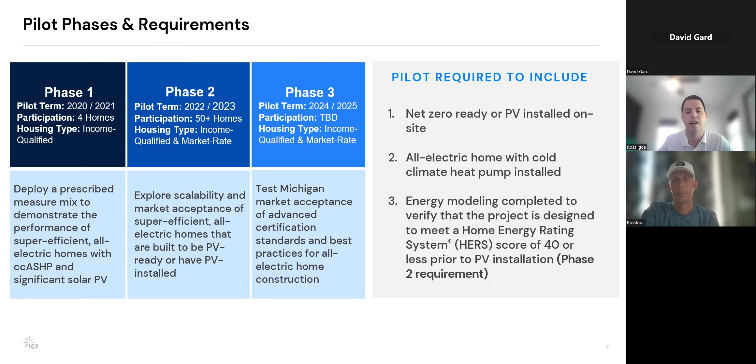Starting in March of 2020, we had the order approving the energy waste reduction settlement and kicking off the pilot in Q2 of 2020, closing out and starting the evaluation piece in Q2 of 2021.

Next came the kickoff for the phase 2 all-electric homes pilot, which was July 14th of 2021. As we continue working with builders on phase 2, we expect this to wrap up probably Q4 of 2023, Q1 of 2024, as we close out over 50 homes that have met program requirements and received pilot incentive dollars.

Next, as I noted, we're looking to launch phase 3 between Q4 of 2023 and Q1 of 2024, focused on the national certifications. We hope to work through this pilot over about a two-year period to enroll projects and provide incentives for those national certifications through Q4 of 2025.

So that's an overview of the pilot purpose, timeline, and objectives. Now I'd like to dive into the specific phases, starting with phase 1.

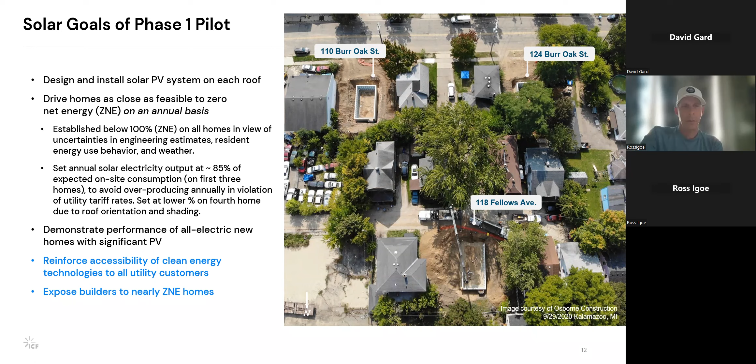Using our modeled results compared to a dual fuel home baseline, there are significant savings. As projected, each home will realize about 75 MMBTU, or 70%, in energy savings.

There's a 58% reduction in annual energy costs with the PV system because of net metering rates. Before the PV system, this 1,440 square foot home is about 10% lower in operating costs, just based on the all electric and super efficient aspects of the construction. The home also has a 91% reduction in CO2 emissions for the end use customer over a code minimum dual fuel home.

Based on the final inspection by an independent rater, the homes as modeled are at a HERS 41 before PV, 20 points down from a code minimum dual fuel home, which would come in around a HERS 62. With the PV system, the homes get down to a HERS 5. If the PV system was sized just a little bit larger, we would really meet that net zero mark.

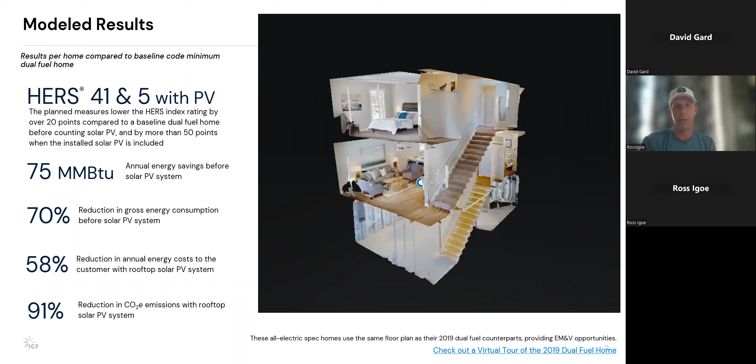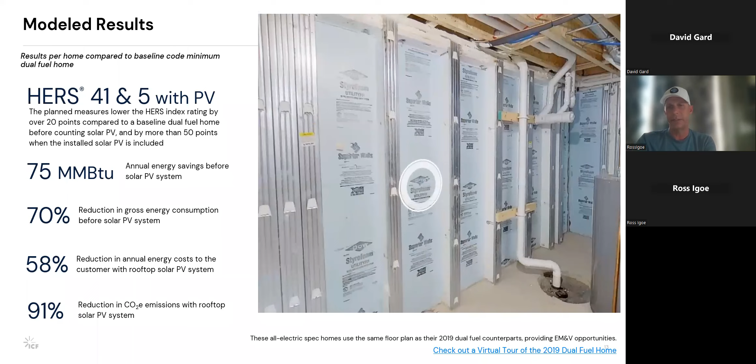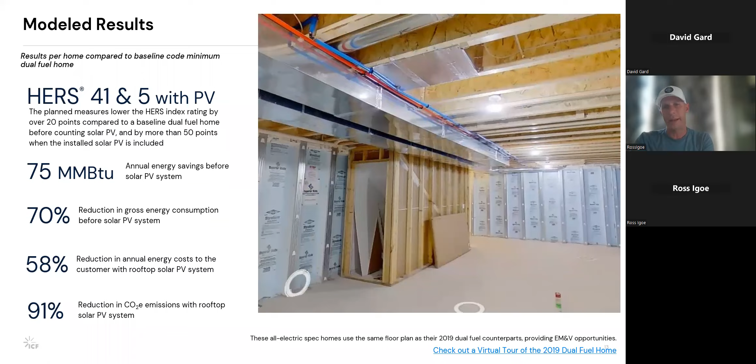Using the virtual walkthrough technology, we also have a quick video that takes you through the completed home. Note that this is one of the original dual fuel homes, but the footprint remains the same for the phase 1 homes. They utilized Superior Walls, R12, and continuous insulation in the basement.

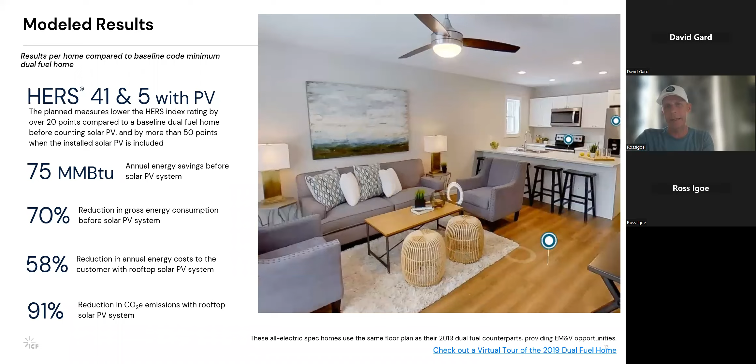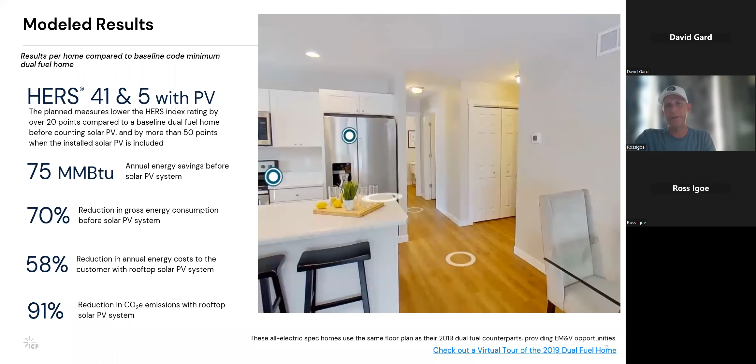Again, the house is just like any other house you'd see, and I think all of us thought it was important to show people that you can do this with the technology we have, and it's actually feasible in Michigan. The houses were all equipped for families moving into them, so it really turned out very well.

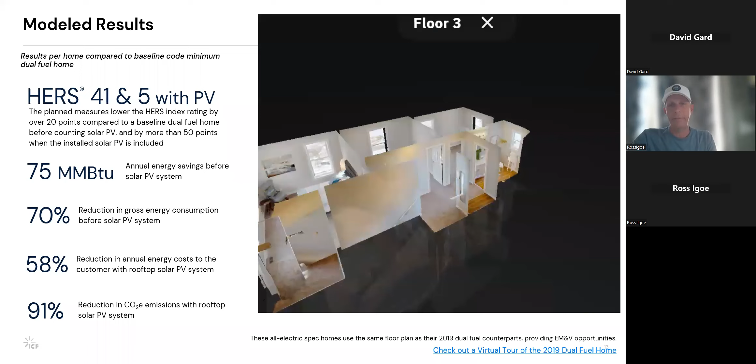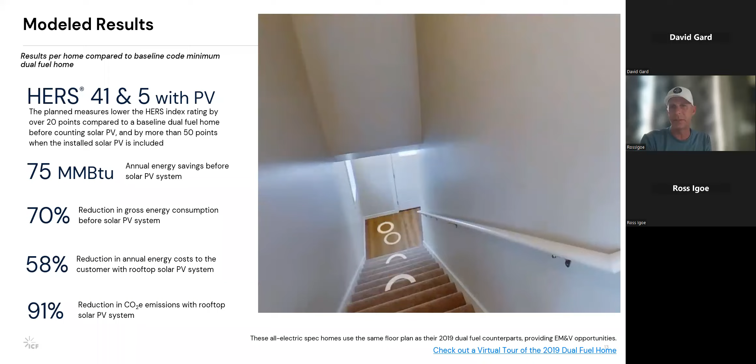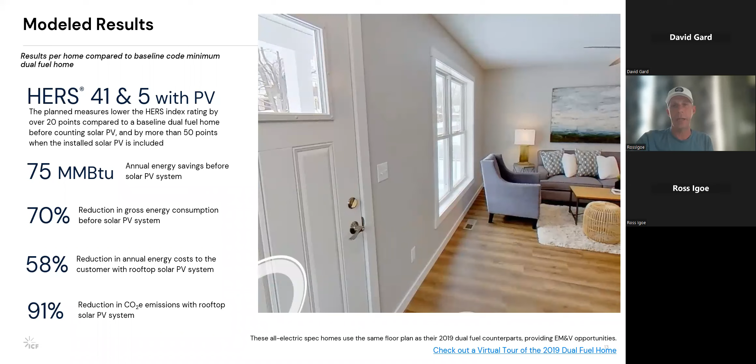We had triple pane windows installed in the phase one. Again, like Ross talked about, R25 in the walls with the 2-inch spray foam and 3.5 inches of blown cellulose, R60 in the attics. Just a really well-designed envelope, and they all tested very well on the air changes in hour 2.

Again, behind the walls, these are some of our QA efforts that we did on the phase one pilot, just kind of doing a HERS rating thing on our own and supporting the raters in their efforts.

But you can see the ERV installed there. The cold climate heat pump was a ducted system. The heat pump water heater. You can see some of the PV installed on the rooftop of the one house that we're showing there.

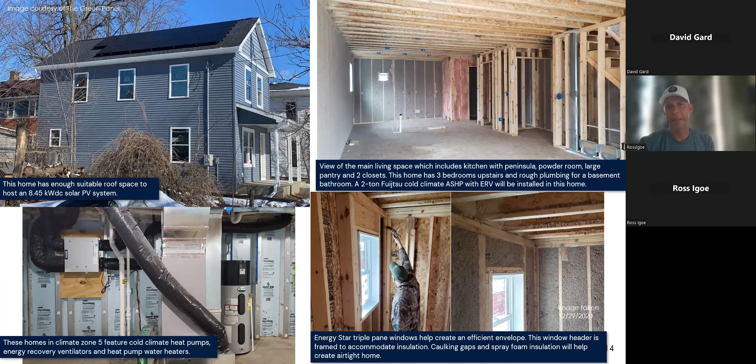And we also see that there's some air sealing going on. But the builders really utilized efficient design in the construction of the houses so that they could stack plumbing and HVAC runs more easily for installation.

In addition to the excitement from the community, it was also great to hear positive recognition and experiences from the home builders of the project who had no previous experience building all-electric homes. This kind of reception and testimonials from builders was monumental in knowing that these types of results are achievable and could be scalable to other home builders across Consumers Energy electric service territory.

As a rater myself, the experience working with the builders in phase one was eye-opening. They were very receptive of any and all suggestions made to them from a number of people that don't build homes themselves. Myself, Ross, some of the other leaders of our program here, the builders were just on board with just about everything. And as you can see from Aaron's testimonial there, we provided a lot of support, and they were very willing to learn from what we had to offer. So it was a real great partnership and continues to this day.

KAHP Partners and Builders, Consumers Energy, and ICF also had the opportunity to engage with the community on the project and what had been completed in phase one. During the parade of homes in 2021, the phase one homes had over 500 visitors who were also able to learn more about the all-electric homes that participated in the phase one pilot.

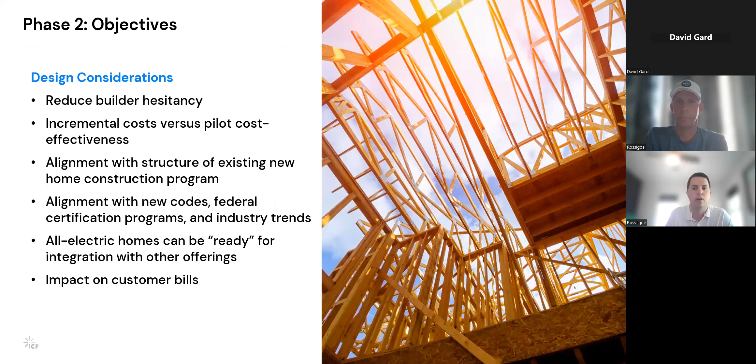So with those design considerations in mind, we developed our recruitment strategy to reach different builders across Consumers Energy's electric service territory. This included leveraging our relationships with regional as well as the state's HBA, or Home Builders Association, to help spread the word of the program. We utilized their weekly or monthly newsletters to promote the program and the incentives to find potential leads across Consumers Energy's service territory.

Another huge piece is working and collaborating with HERS rating companies across the state. Builders truly rely on their HERS rating company as a consultant, helping them navigate the changes of going from a dual fuel home to an all-electric home. So we wanted to make sure we were teaming up with those HERS rating companies and acting as a collaborative partner rather than a separate entity. We truly knew, through our phase 1 efforts, that it takes collaboration amongst all parties to deliver the results we were looking for.

And then lastly, and this kind of goes hand in hand with collaboration with rating companies, was providing that high degree of technical support, whether for the builder or HERS rating company, to help them understand our program requirements, what we were looking for, as well as the QA/QC we do during pre-drywall inspection and final inspections that the HERS raters attend. We can help identify corrective actions throughout the building envelope that help builders continue to seal up those homes, insulate correctly, and make sure that home is as tight as possible for future homeowners.

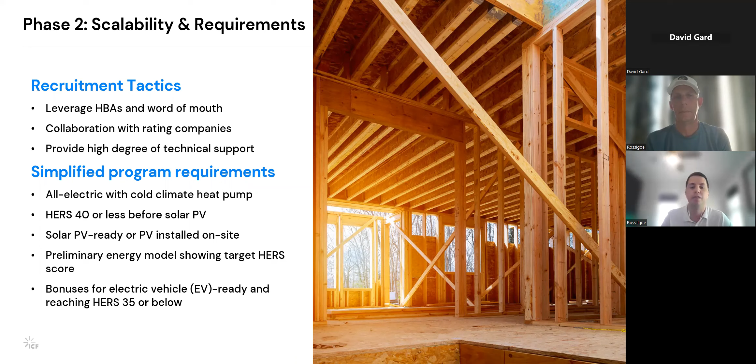With that said, I wanted to give an overview of our incentive structure and overall term, goals, and process. We launched formally on July 14th, 2021, and are currently still implementing the program with the intention of ramping down at the end of this year. Our goals and targets included a target participation of over 50 homes, and I'm happy to say we have 60 homes either completed or in our pipeline to be completed at the end of this year or beginning of 2024, depending on construction timeline. We are also hoping to have an equal mix of market rate and affordable housing.

Before we dive into process, I wanted to give an example of our incentive structure. We have two different pathways, one for market rate building and one for income qualified building. To meet our requirements, which is all electric, having PV ready or PV added on site, and designed and constructed to meet a HERS rating score of 40 or less, would provide market rate builders with $10,000 in program incentive, and income qualified builders with $20,000. We then offered bonuses of $2,500 for HERS 35 or less for market rate, and $5,000 for income qualified, and lastly a $500 bonus for level 2 EV charging.

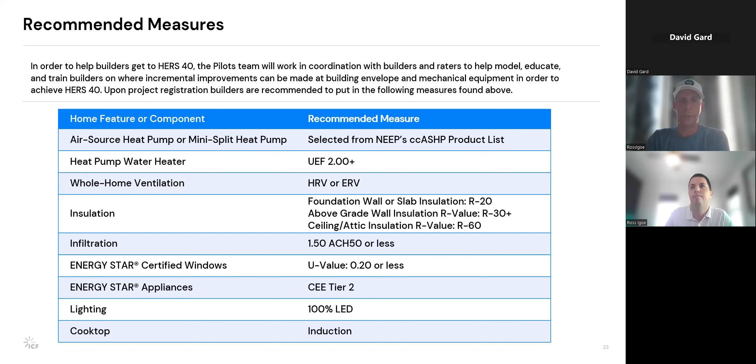The first story unit earned a HERS 36, second story unit a HERS 39, and the ADU a HERS 40. First story duplex came in at 1.3 air changes an hour with the larger volume, including the basement. Second story duplex came in at 2.8 ACH50. The builders actually modified the truss design and kept all the ductwork within the conditioned space, which was a huge part of getting down below HERS 40.

And the ADU was at 4 air changes an hour with the very low volume that was included in the house. But again, that ductwork was kept within the conditioned space by modifying the truss design so it could easily be placed under the insulation within the thermal boundaries. All included the cold climate air source heat pumps, heat pump water heaters, ERVs for ventilation, and the high performance envelope that we've touched on a number of times here.

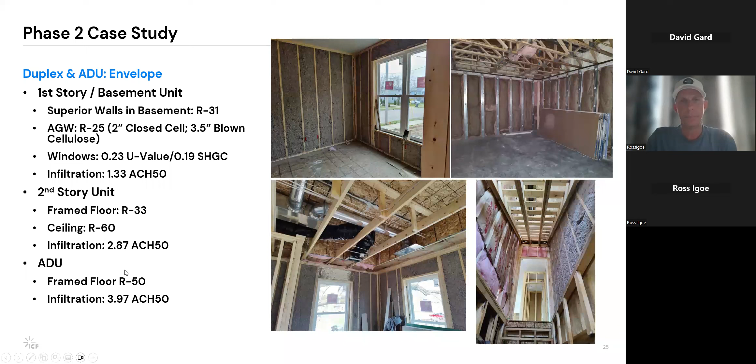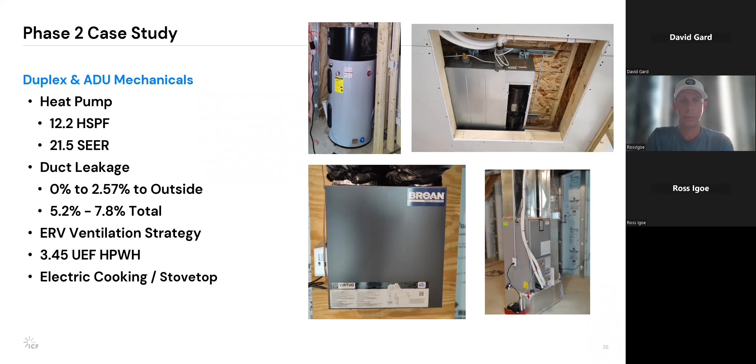Awesome. Thanks, Ross. Yeah, we're really, really happy with the duplex ADU project. It's probably the most unique of all the projects that went through the pilot so far. We look forward to a couple more interesting ones that are currently under construction and happy to share learnings from those. And if you do have any questions on those, feel free to reach out to us directly and we'd be happy to walk through that case study further.

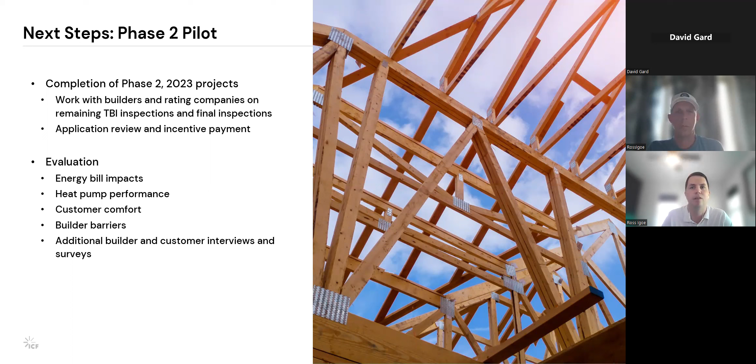And then lastly, we'll be getting to jump into the evaluation piece as construction is complete on these homes, and that would include energy bill impacts, heat pump performance, and then continued interviews with builders and customers to understand customer comfort and builder barriers in the program.

Challenges and opportunities and next steps beyond phase 2. So first would be the planning and launch of our phase 3 pilot with national certifications. We want to continue to identify scaling opportunities through production builders. Like I said, scalability is one of the key pieces that we're looking to learn and determine if it's right for either a national production builder or a small regional production builder to take the jump into all electric building. And we'd love to be a part of that. So if you are aware of any builders that are interested, please let us know.

Stimulate market drivers through educational tactics. We want to increase customer demand of all electric homes. We want to continue to reduce builder hesitancy. And we want to identify potential other funding opportunities through tax credits through the Inflation Reduction Act and 45L tax credit. We would like to identify levers for program cost effectiveness and appropriate metrics. Identify impact on customer bills with current utility rates, and integrated utility investment models versus regulatory barriers.

And this is one of the challenges that we've seen just with utility investment models, and some IOUs can be siloed in some sense. We want to figure how we can bridge those gaps between the different silos, let's say the renewables division and energy efficiency division. So we can help bridge those barriers.

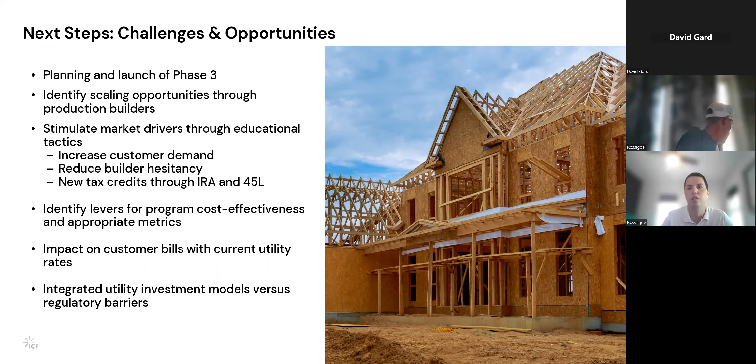So that's all I have. I'm happy to provide some Q&A. David, thank you again for the opportunity, allowing us to share these learnings here today.